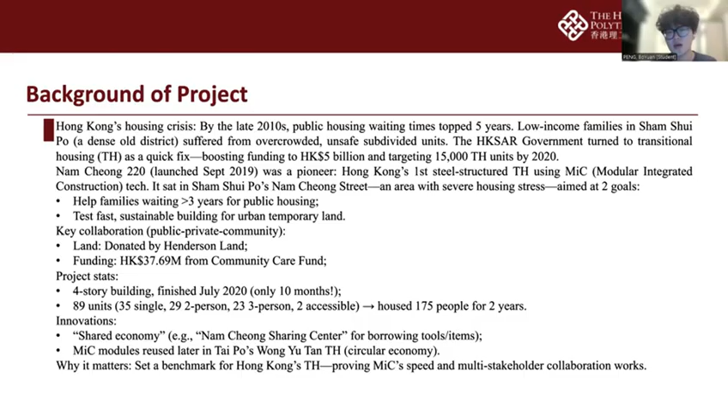It has a shared economy, for example, the Nam Cheong Sharing Center to borrow tools or items, and the MIC modules are reused later. So why does it matter? I think because it set a benchmark for Hong Kong's transitional housing, proving MIC speed and multi-stakeholder collaboration works.

So let's go through the work breakdown structure. Our project is located at Nam Cheong Street, Sham Shui Po. The main goal is to build a 4-story steel structure building with 89 units, all using MIC technology, which means 68 module units prefabricated in factories.

We need to finish assembly within 12 months, pass all government inspections, house 162 residents for 2 years, and then dismantle the modules for 100% reuse. The key constraints are temporary land permits, coordination between MIC prefabrication and on-site hoisting, Hong Kong's strict environmental rules, and full recycling requirements.

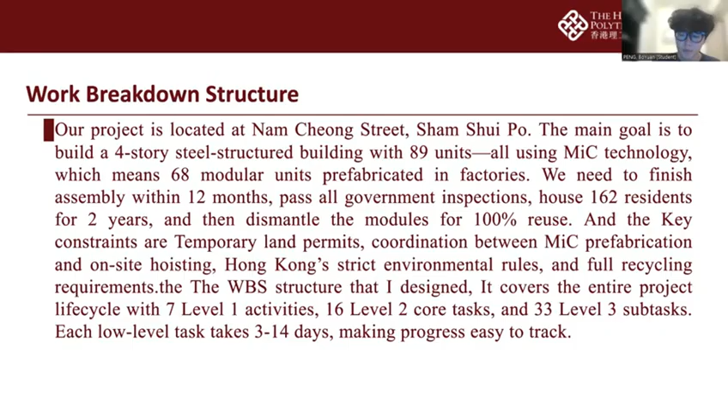The work breakdown structure that I designed covers the entire project lifecycle with 7 level 1 activities, 16 level 2 core tasks, and 33 level 3 subtasks. Each low-level task takes 3 to 14 days, making progress very easy to track. So I will walk through the work breakdown structure of our project.

First, project initiation and preliminary preparation. We will compile basic documents like the project charter and the feasibility study, then apply for compliance, including a 2-year temporary land permit. We will also collaborate with Henderson Land for the land, build our core team with MIC experts, and secure 37.69 million Hong Kong dollars in funding. Plus, we will engage the local community, hold residents' meetings, and survey potential residents' needs for 1 to 3 person units.

Next, design and MIC module prefabrication. We will finalize the 4-story layout with 89 units and split the building into 68 standardized MIC modules. After internal technical reviews and government approval from the Buildings Department, we will start factory prefabrication, like procuring steel, producing modules, pre-installing water, electricity, kitchens, and furniture, then conducting strict quality inspections before delivery.

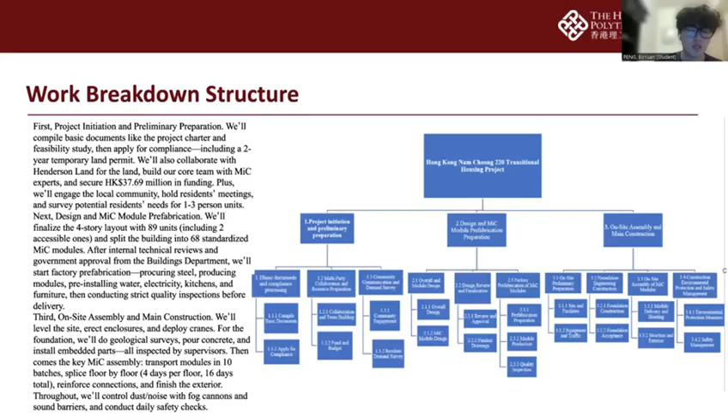Third, on-site assembly and main construction. We will level the site, erect enclosures, and deploy cranes. For the foundation, we will do geological surveys, pour concrete, and install embedded parts, all inspected by supervisors. Then comes the key MIC assembly. Transport modules in 10 batches, splice floor by floor, 4 days per floor, 16 days total, then reinforce connections and finish the exterior. Throughout, we will control dust and noise with fog cannons and sound barriers, and conduct daily safety checks.

Fourth, supporting facilities. We will connect to municipal water, electricity, and gas, test all pipelines, build public spaces like activity rooms and children's play areas, install access control and firefighting systems, then clean and configure each unit with appliances before minor repairs.

Finally, quality inspection and compliance. We will test the module splicing strength, structural safety, and indoor air quality, then pass specialized inspections from the Buildings Department, Fire Services Department, and Environmental Protection Department. Any defects will be rectified quickly, and all documents will be filed with the government.

So to sum up, our WBS is streamlined but comprehensive, focusing on MIC efficiency, multi-stakeholder collaboration, and Hong Kong's compliance requirements. It ensures every phase is manageable, trackable, and aligned with the project's goals of speed, sustainability, and community impact. So that's my work breakdown structure overview.

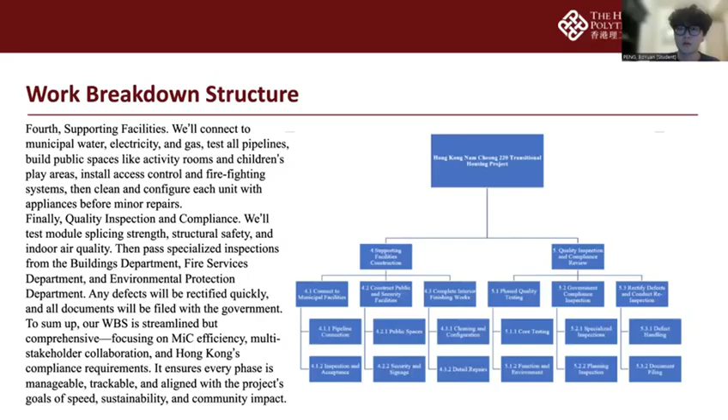Let me discuss the detailed schedule of this construction project. The duration of this project is around 330 days without the preparation works like the community engagement or the design issues, which may add around 45 days. For this project, most of the schedule is similar to other projects, so I will not spend much time discussing these schedules.

One special thing I need to point out is that we defined Zone A and Zone B in the program, and there is a little difference: Zone A requires 7 days per level for constructing the ground level to the top level. However, Zone B can make 4-day cycles per floor in the construction period.

The reason is the MIC method is still a new technology in the Hong Kong construction industry. The workers and the supervision team have to learn whether there are any difficulties in installing the MIC modules. Let's say they can check the grades of the steel frame, and the supervisor can point out some improvement works for the installation of the MIC modules.

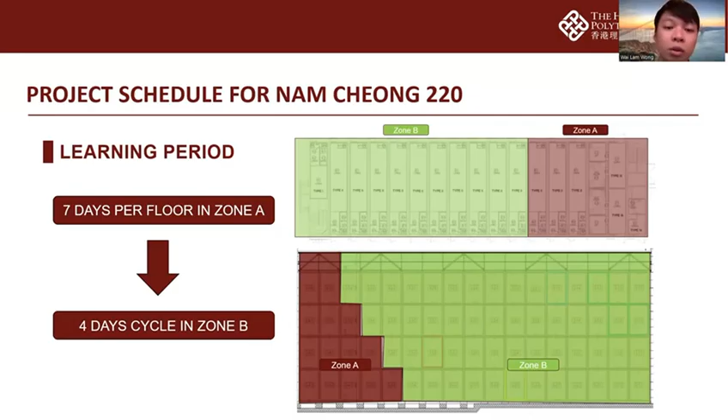Okay, next I will talk about the cost estimation section of our project. This analysis provides a comprehensive breakdown of all project costs with both normal and crash time. Our cost estimation followed the detailed WBS structure from our project and complies with Hong Kong Institute of Surveyors guidelines. We use the current market rates and all costs expressed in Hong Kong dollars.

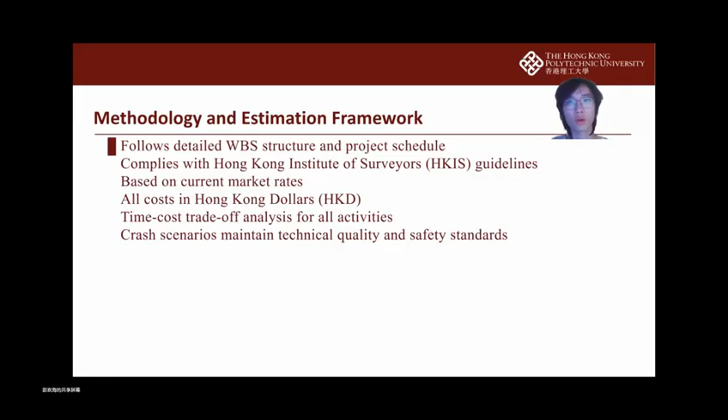For every activity, we conduct time-cost trade-off analysis to determine both normal and crash parameters. Importantly, even in the crash time, we maintain all the technical quality and safety standards.

Our analysis shows the project can be completed in 45 days plus 330 days under normal conditions, or compressed to 32 days plus 254 days in crash time. Key compression opportunities exist in item A, project preparation works, which can be reduced from 45 to 32 days. And item C, design submission process, which can be shortened from 98 to 72 days.

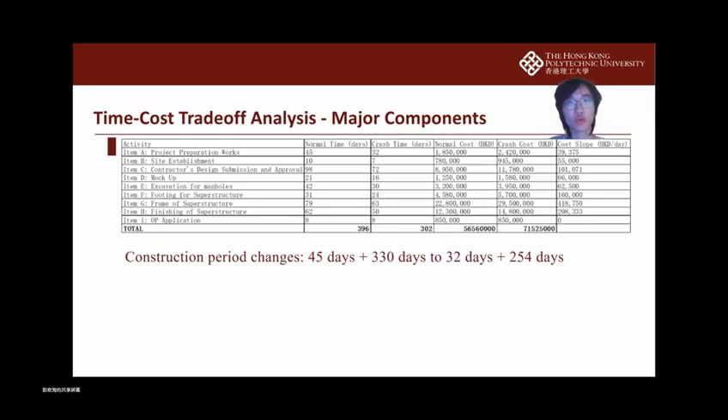Item G, frame of the superstructure activity, offers the most significant compression potential, reducing from 79 days to 63 days. This is the detailed cost breakdown by activity.

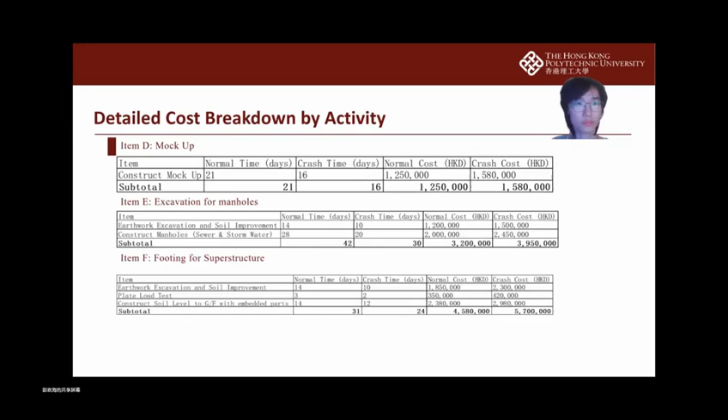Our indirect cost showed a significant increase in crash time. Project management cost rose by 20%, while equipment rentals and maintenance cost increased by 31.5%, reflecting the premiums for expedited equipment access during the accelerated work.

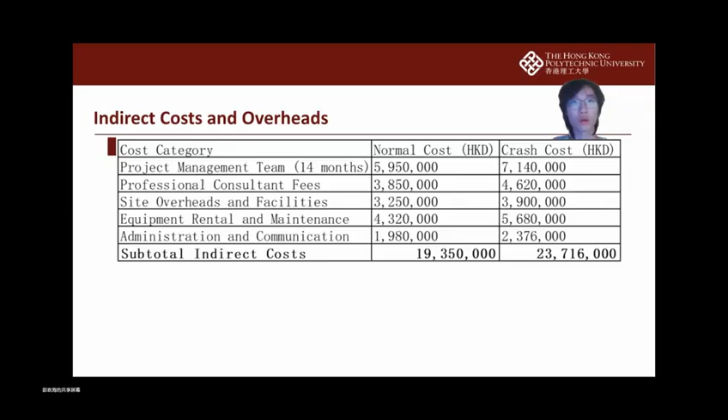Both figures remained well within the 120 to 150 million Hong Kong dollars budget specified in the standard requirements. That's all.

Hello everyone, my name is Zhang Deyao. This is my part, project control. There are 4 parts: schedule control, cost control, quality control, and risk control.

First, schedule control. We set a clear baseline, 316 days from August 1st, 2019 to July 5th, 2020, covering 4 key nodes: site establishment, design approval, superstructure frame, and finishing works. Task dependencies are clearly defined, such as MiC component design starting post-footing completion.

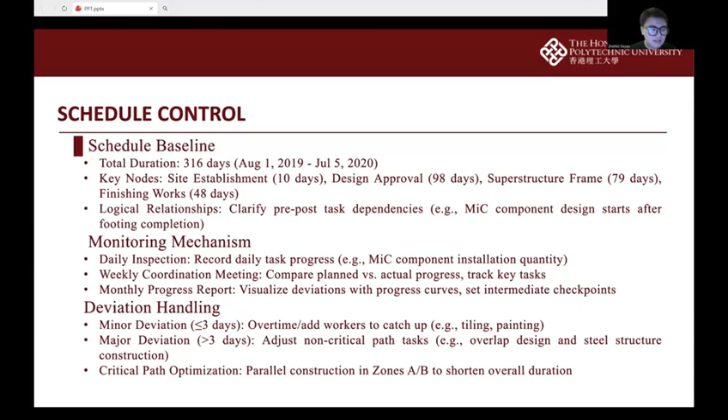Next, cost control. The budget is Hong Kong dollar 120 to 150 million, accounting for 50% of the company's annual turnover. We allocated cost to each task and reserved 5% to 8% contingency funds for geological anomalies. We adopt earned value management to track PV, AC, and EV, using CV and SV for oversight.

Cost optimization includes bulk procurement and supplier bidding for materials like MiC components, modular construction with advanced equipment, and reuse of excavated soil to cut waste cost.

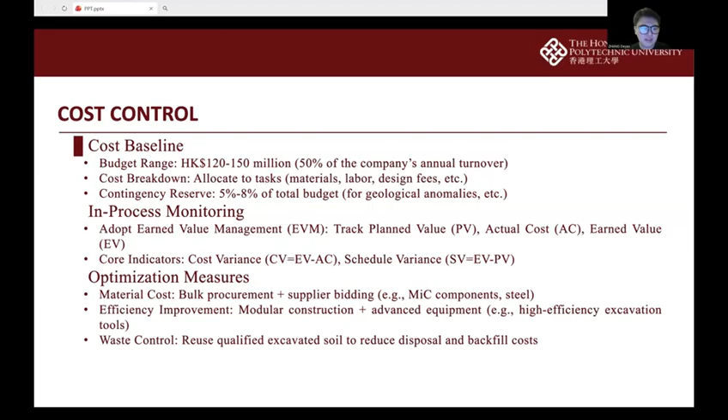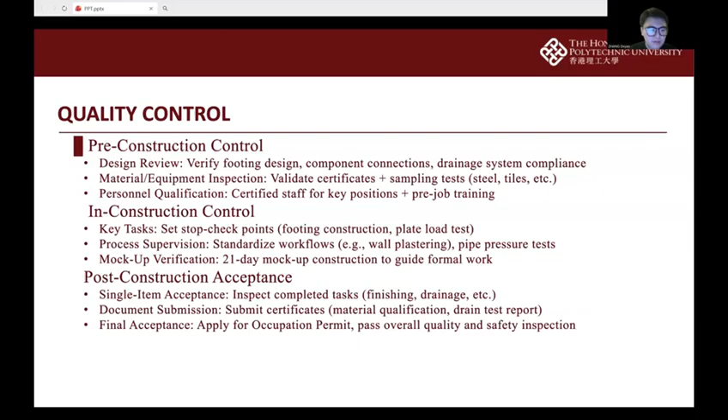Then, quality control, our project's lifeline. We built a full cycle system: pre-construction design reviews, material sampling tests, and certified staff training. In construction, stop checkpoints, standardized workflows, and a 21-day mock-up; post-construction single-item acceptance, document submissions, and final occupation permit application.

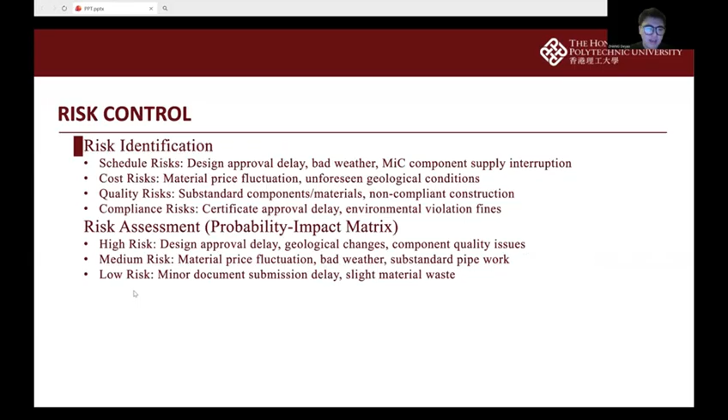Finally, risk control. We identified 4 risk categories: schedule risks, cost risks, quality risks, and compliance risks. And the risk assessment: high risk, design approval delay, geological change, component quality issues; medium risk, material price fluctuation, bad weather, substandard pipe work; and low risk, minor document submission delay, slight material waste.

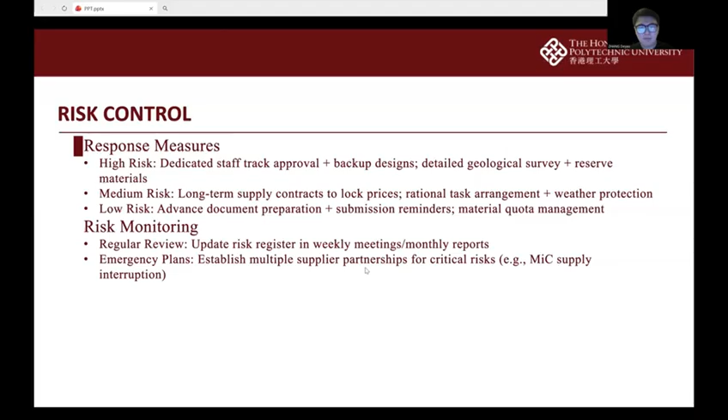And the response measures: for high risk, we have dedicated staff track approvals and backup designs, detailed geological survey, and reserve materials. For medium and low risk, there is risk monitoring, regular review, updating the risk register in weekly meetings or monthly reports, and emergency plans, with multiple supplier partnerships established for critical risks.

Then we will carry out the optimization analysis of project progress. First of all, the previous students have drawn the activity-on-node diagram, and some students have also calculated the cost. We need to conduct analysis and optimization on this basis, and we will use Lingo software for this purpose.

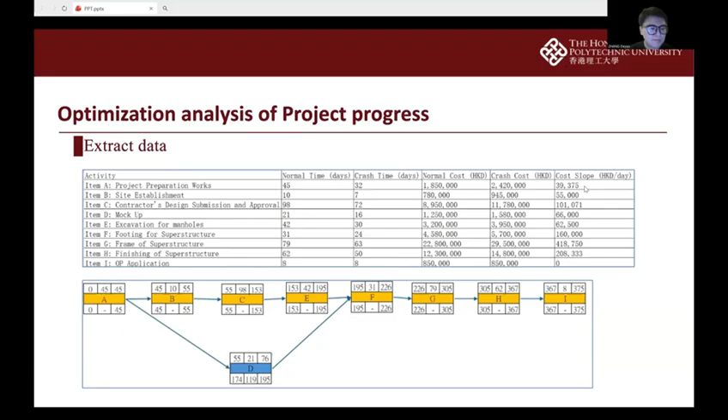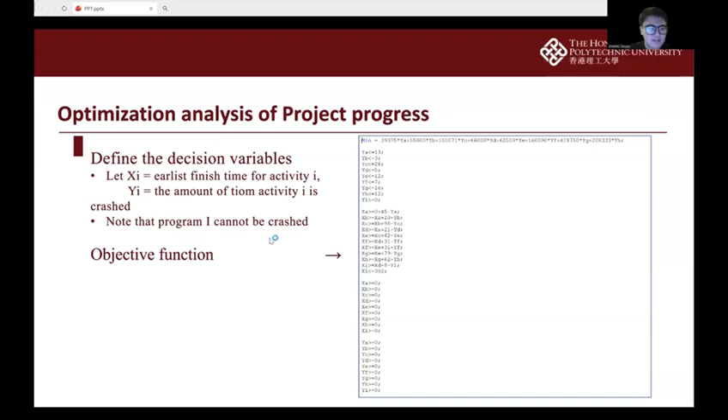First, we need to define the decision variables. Let xi equal the earliest finish time for activity i, and yi equal the amount activity i is crashed. Note that we should know that activity I cannot be crashed. Then input these constraints into Lingo. Yes, it's here.

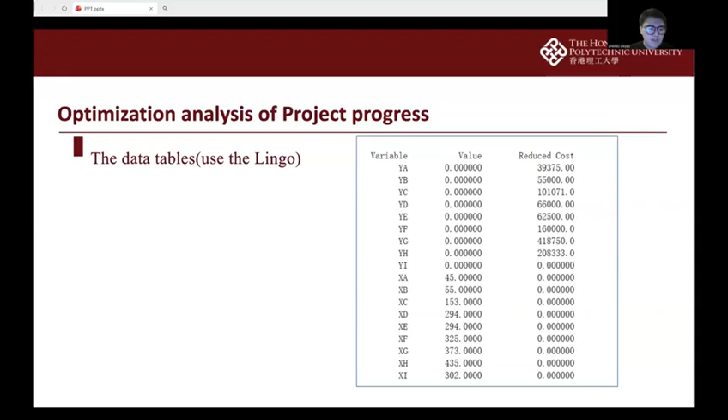These are the data analyzed through Lingo. As we can see, the crash time for all current activities is 0, and the earliest finish time for each activity has also been determined. Ultimately, the project can be completed within 302 days, which meets the schedule optimization target. Yes, that's all.